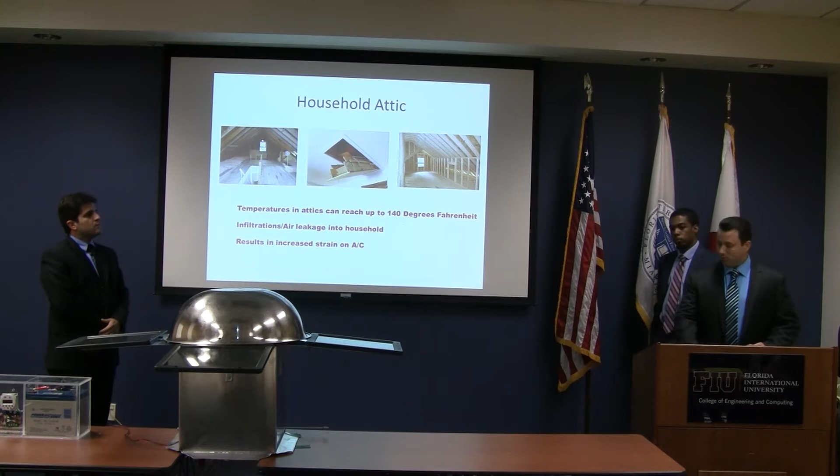We're going to discuss our solar-powered attic fan. Our governing motivation was a result of temperatures in attics reaching about 140 degrees in the summertime in South Florida. Infiltration or leakage into the household can put extra strain on the AC. Also, unwanted humidity can present a problem with potential mold, making it increasingly difficult to store valued items, as well as contributing to energy loss.

Part of the solutions people implement these days are turbines and fans. They can be visually unappealing, provide not really a whole lot of ventilation at the end of the day, and some of them do consume power. So they help you save money, but then they spend money at the same time.

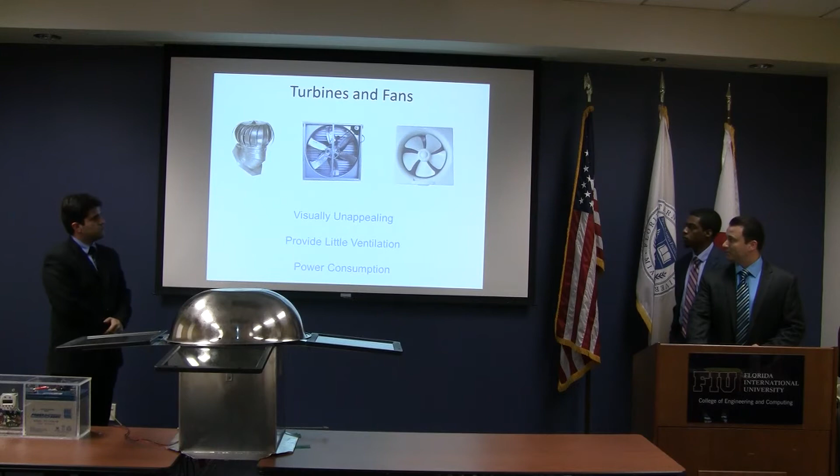Most of these items have been on the market for some time now. The problem with them is that they don't implement any type of rechargeable battery, so if there's no sun, there's no fan spinning, there's no ventilating in your attic. They're basically underpowered in the sense that the average solar-powered attic fan on the market today is about 400 to 500, maybe 600 cubic feet per minute as far as air ventilation.

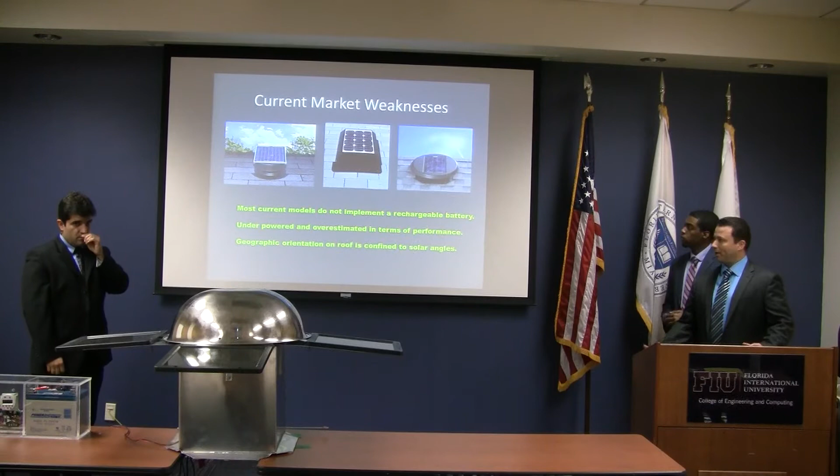That is ideal for some attics, but in other states where you have a larger attic, it's not really helping you a whole lot. As well, there's one solar panel, so the geographic orientation on the roof kind of forces you to put it where you're going to get the maximum optimal sun exposure. It may be on a portion of your house that's unappealing where you don't want anyone to see it, so it's hard to hide these things from your neighbors.

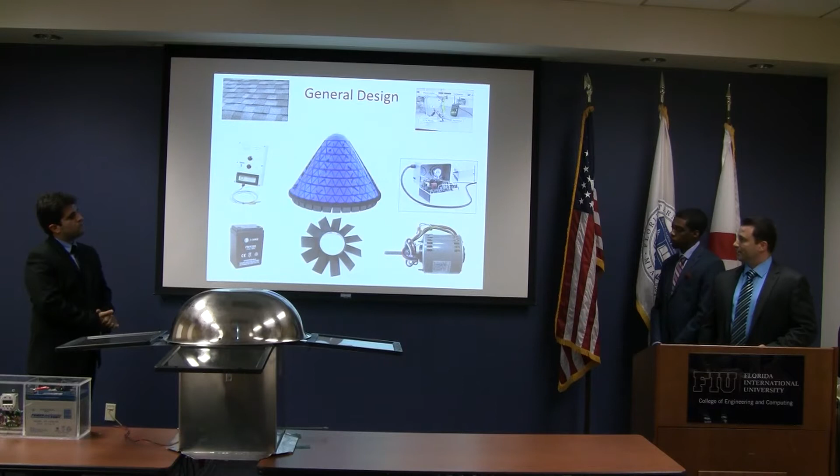General design consists of a photovoltaic cell, which is going to charge a battery, which you see on the bottom left here. The battery then governs a motor-driven fan, and a series of intermediate electrical components will govern the behavior of this. Major components we're going to use are 4 SunForce trickle charger solar panels.

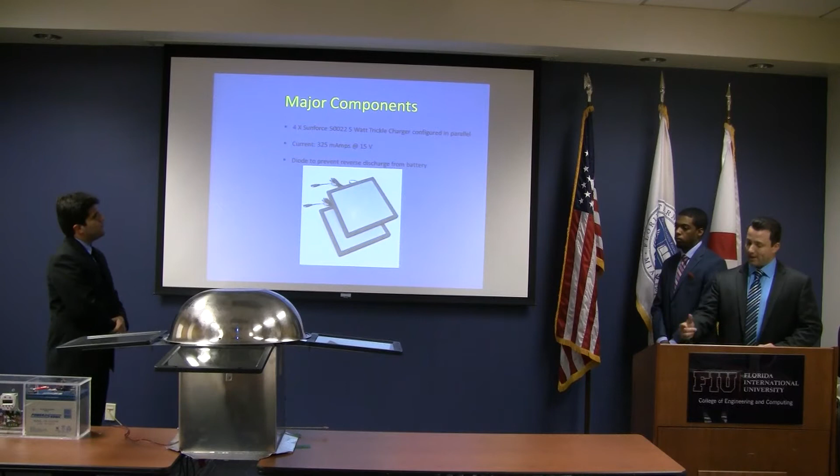We run them in parallel at about 15 volts. They basically produce about a third of an amp. And we have diodes that prevent reverse discharge from the battery, from the solar cell to go back into the battery, so it's going to be basically a one-way current flow.

We have a pulse width modulator, in a nutshell. This is basically to govern the speed of the fan depending on the needs of your attic. You can go from 100 CFMs up to 2,000 CFMs depending on what you need and how quickly you want to do it.

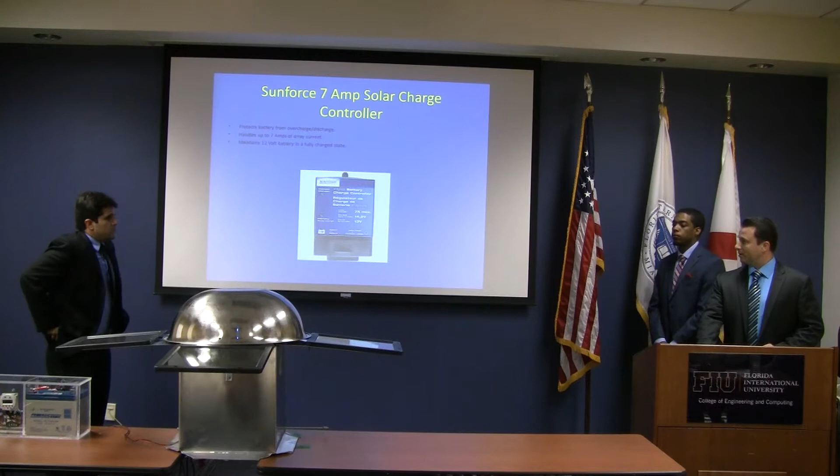So, the charge controller - these are very common with any type of solar system. It basically governs the battery, makes sure there's no accidental discharge, allocates voltage and current, and it's basically a necessity anytime you're dealing with PV cells.

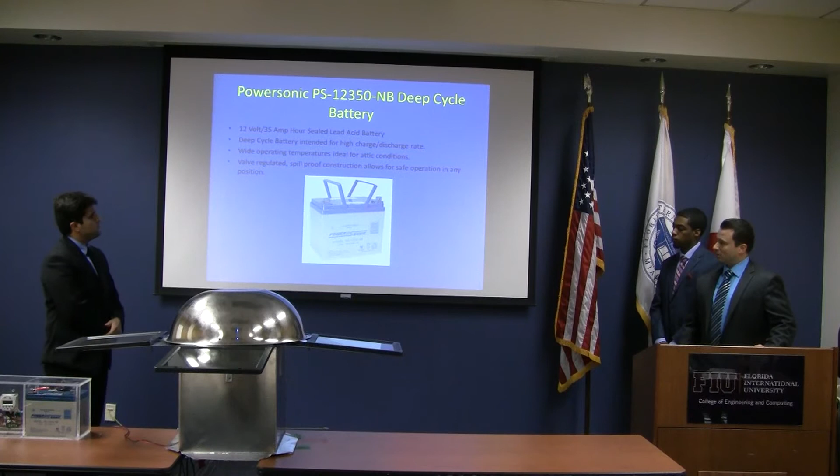Our deep cycle battery - what's different about this is, unlike car batteries, it can be completely discharged and recharged many cycles, many times per day, week, or year. So it's ideal for any type of charging system where you're getting alternative energy. This is basically the backbone of our project.

It's basically governed for a 350 cubic inch Chevy engine, so if it's good enough for that, it's good enough to move air out of an attic, we thought. It's very lightweight, it's basically able to operate in very high temperature environments, and it really requires a low amount of current to run. As I mentioned earlier, it's about a 2,000 CFM rating.

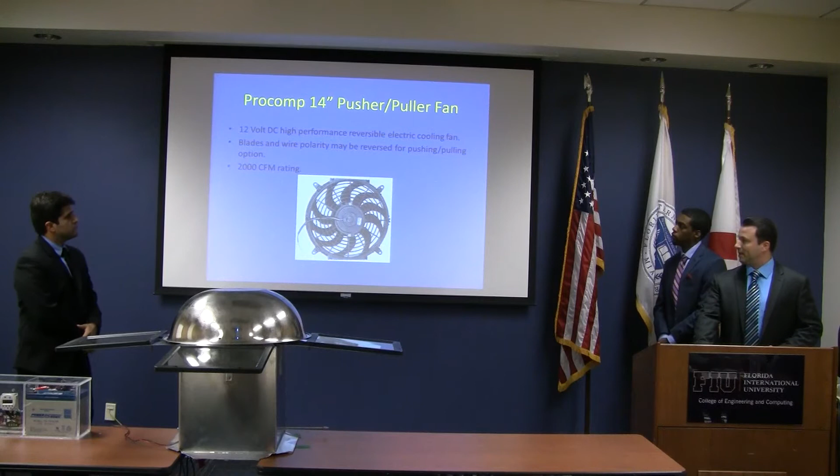Part of our automatic control system here is the implementation of 2 timers we have. Basically they will work alternating with each other. One timer will go, for example, for about 60 seconds, where it rotates the fan, expelling air. We then have an intermediate period where the timer lies dormant.

Then another timer will kick in with a reverse polarity. The beauty of DC current - we can spin the fan in the opposite direction and actually intake fresh air from the outside, depending on what your geographic weather conditions are and your needs for ventilating your attic.

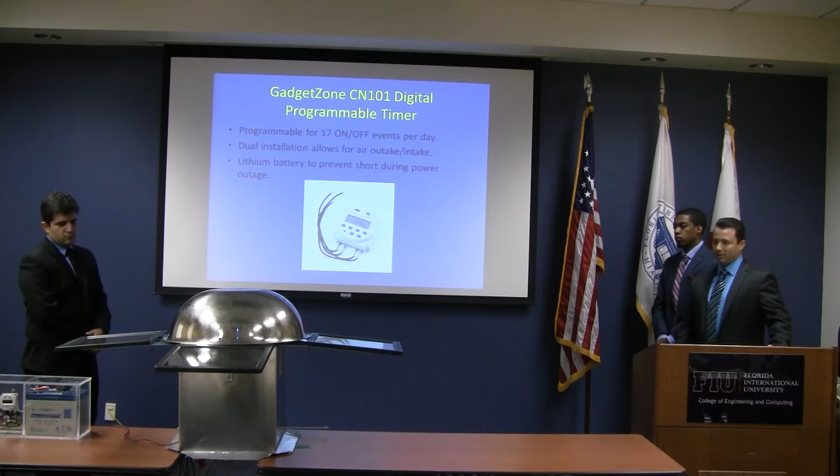This is basically the best aspect of our design. It's what separates it from all the ones on the market. As far as we know, nothing on the market offers this dual nature as far as intake and outtake of air under one design. So that's pretty much our pride and joy of this design here.

This is basically the electrical system minus 3 other panels. As you can see, the PV panel charges the battery, runs the fan to the charge controller. This is our housing, final product, as you can see in front of you. Basically everything was made from a sheet of aluminum that we cut and bent ourselves.

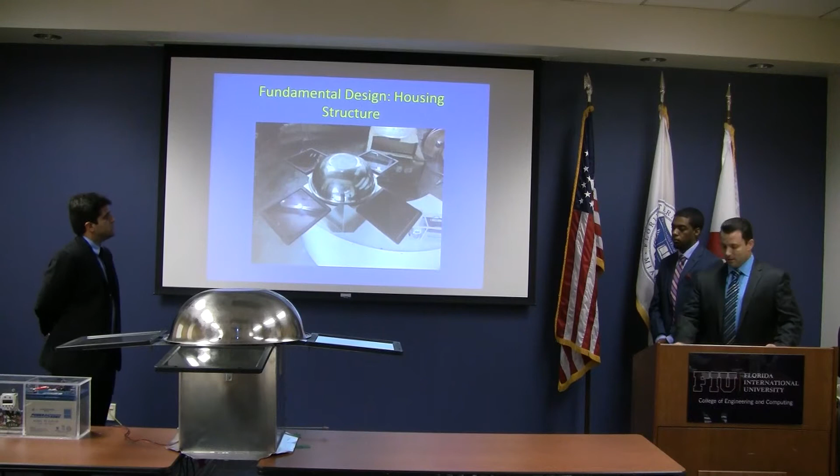This is our control system. You see the two timers, the charge controller, and the pulse width modulator is buried in the back there, in conjunction with the deep cycle battery.

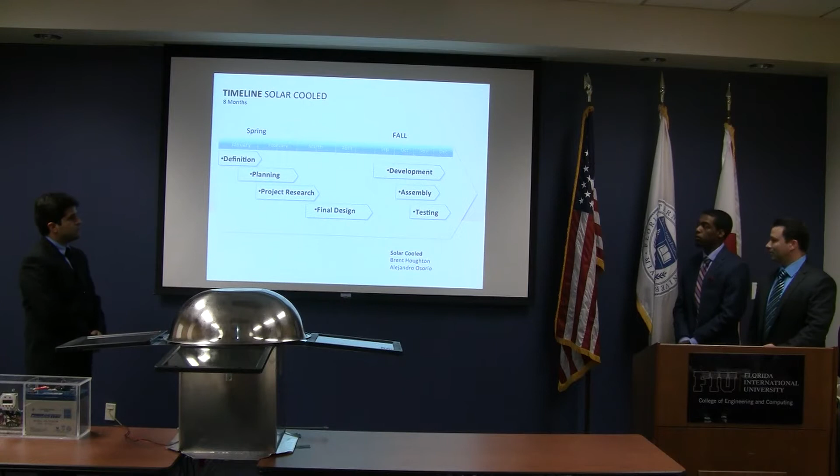I'm going to let Dominic come in and discuss our timeline. As you can see, we started in senior one, got up to our research process, and did the fundamental design. This semester, second semester, we developed what you see in front of you. We began assembly about a month ago, and then testing was kind of tricky, but we got some initial testing done.

Regarding the literature survey: attic fans, solar powered attics, and photovoltaic cells. We have the attic fan used in both warm and cold climates. In summer mode, the temperature in the attic can reach over 160 Fahrenheit.

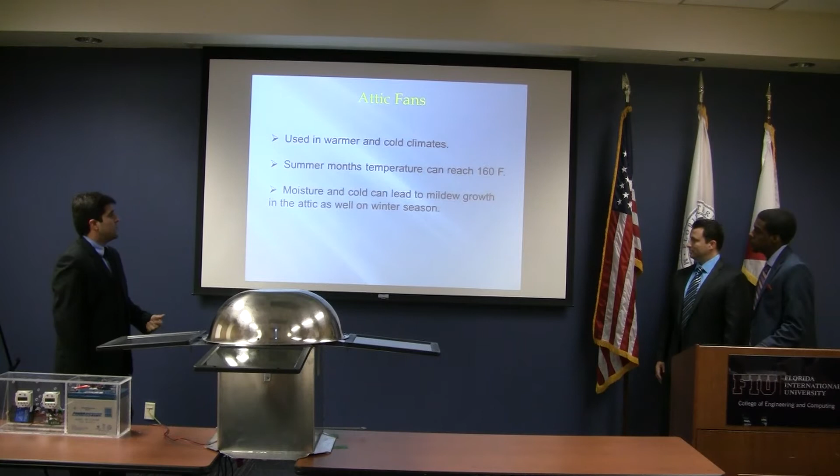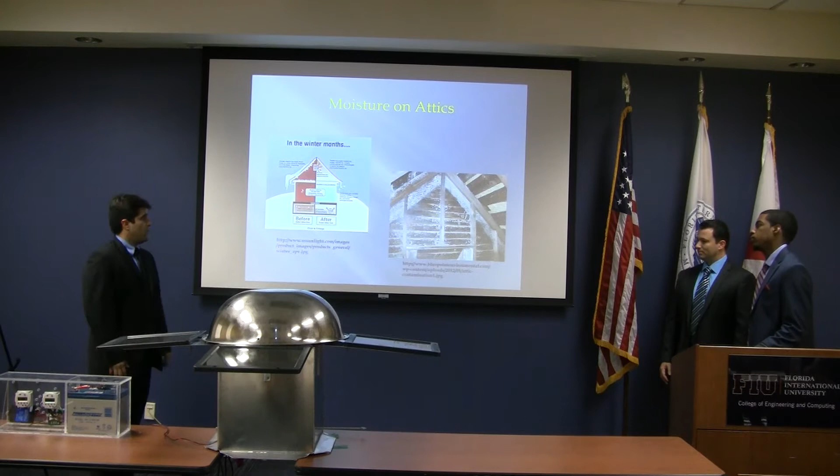In summer season, the attic temperature can reach over 170 degrees when you have the unvented part of the house. In contrast, on the vented side of the house, we can reach temperatures of 150 degrees.

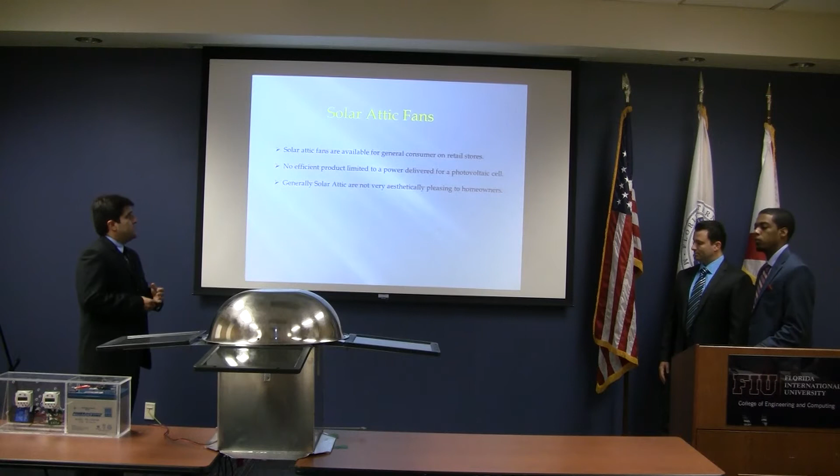Solar attic fans are available to all customers at the most common retail stores like Home Depot and Lowe's. But these products are not efficient; they are limited to solar photovoltaic cells. Our product has a battery incorporated, and we also tried to make it aesthetically better than what's currently on the market.

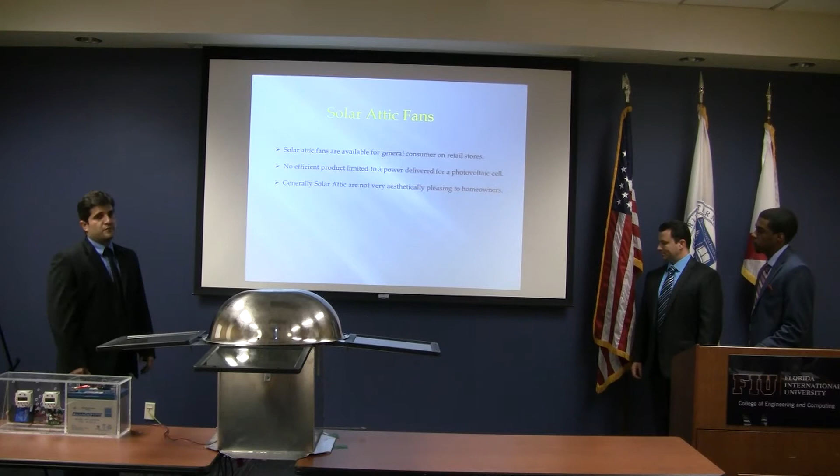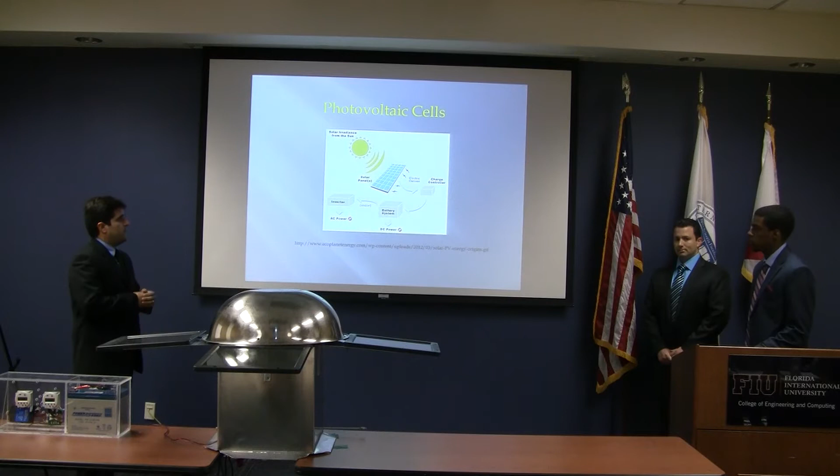This is a diagram of how the photovoltaic works. They take solar radiation from the sun and convert it into electrical current at the controller charger, which then delivers it to the battery as DC power, or to an inverter to convert it to AC power.

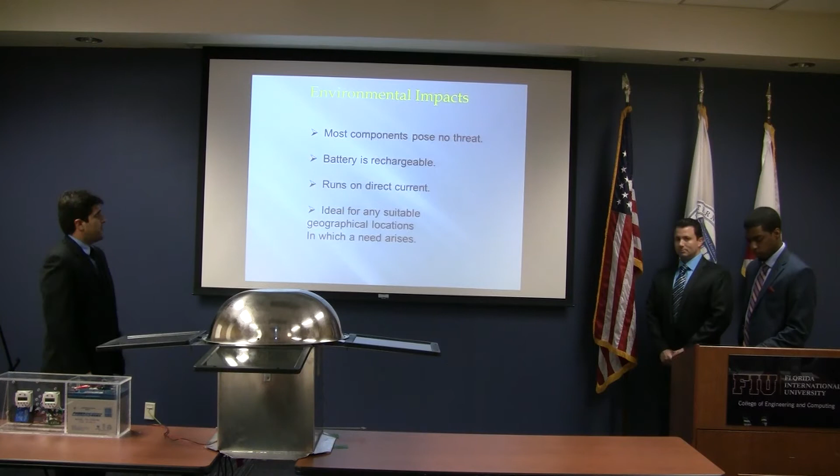The environmental impact of this project: most of the components cause no threat to the environment. The battery is completely rechargeable, runs on direct current, and because of this, it's ideal to install in any location.

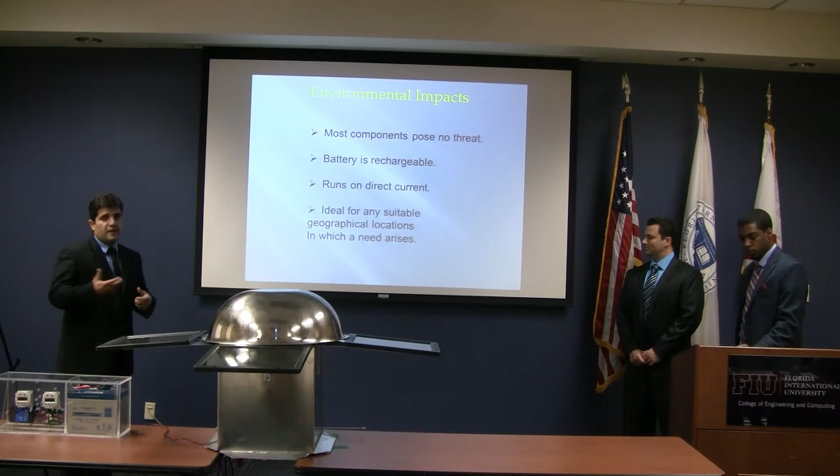The photovoltaic cell, as everyone knows, generates a large amount of electricity without producing any pollution to the environment. Photovoltaic cells also have a working life of about 30 years.

The manufacturing companies that build this kind of product have a lot of laws against them, with a lot of chemical controls related to the environment.

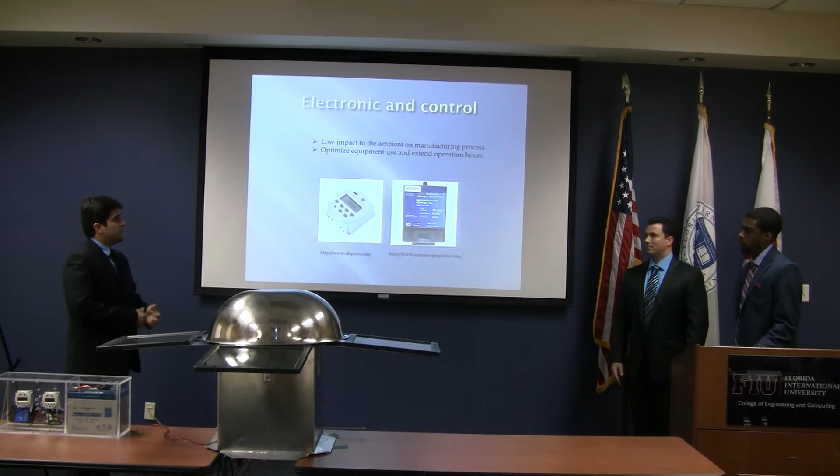There's 96% of the components that are recyclable. The lead-acid battery contains about 60 to 80% plastic, which is also recyclable.

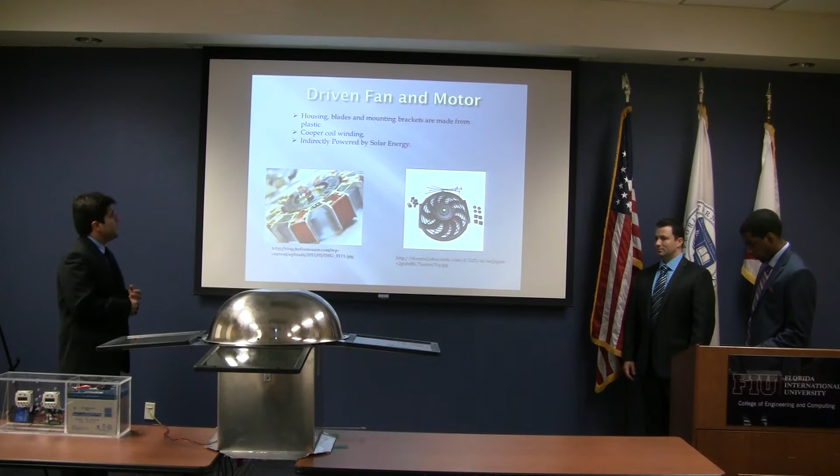So for all this, we have the standards that we followed when we tried to design this experiment. One of the standards we use in building the aluminum body is the ASM, American Society for Metals. So I'm going to let Dominic explain the environmental concerns.

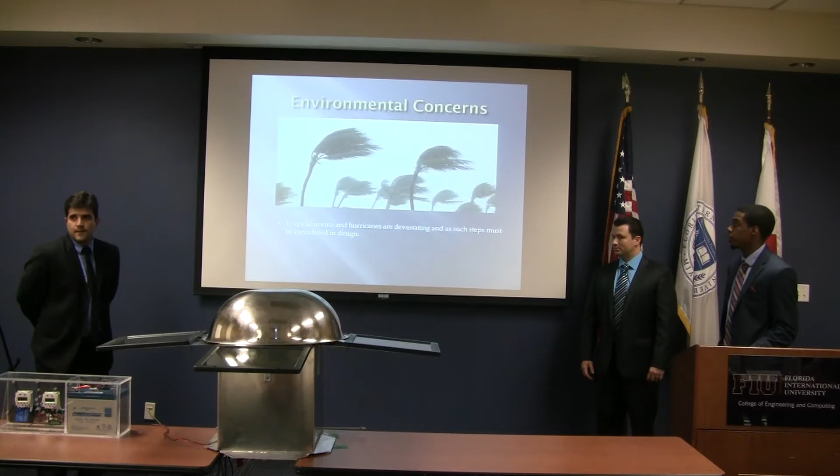Especially being that we live in South Florida, every couple months, especially during the summer periods, we're affected by tropical storms and hurricanes. As such, we needed to take this into consideration when we were designing. Tropical storms, according to the Saffir-Simpson scale, have different categories, up to a category 5 storm.

That wasn't included here because it wasn't taken into consideration for the design. It was the wind loading which would result from category 5. Winds would be too great.

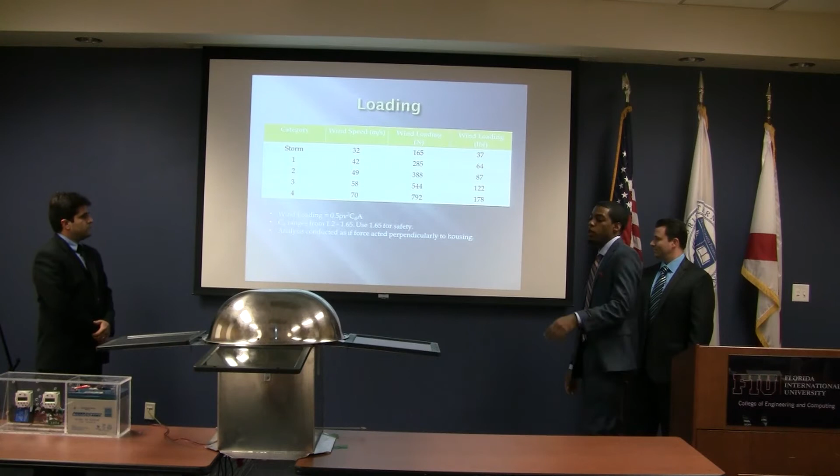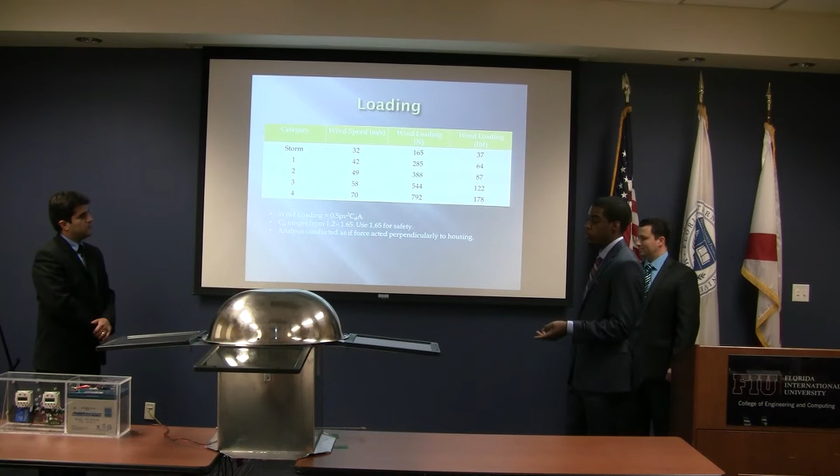As I said about wind loadings, we use this formula to determine the wind loading which would occur, assuming the winds are hitting the prototype perpendicular. The CD stands for the coefficient of drag. To accurately determine that we need a wind tunnel, and that was beyond what we needed to do for this project. So based on research, it ranges from 1.2 to 1.65. I chose 1.65 in order to account for all conditions.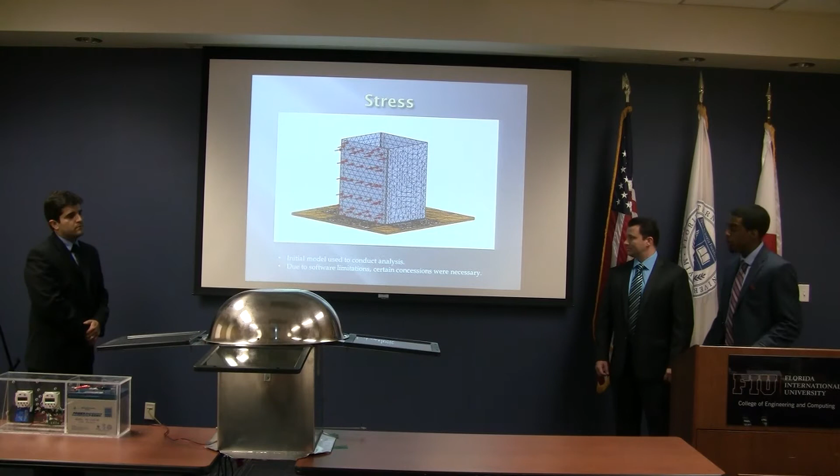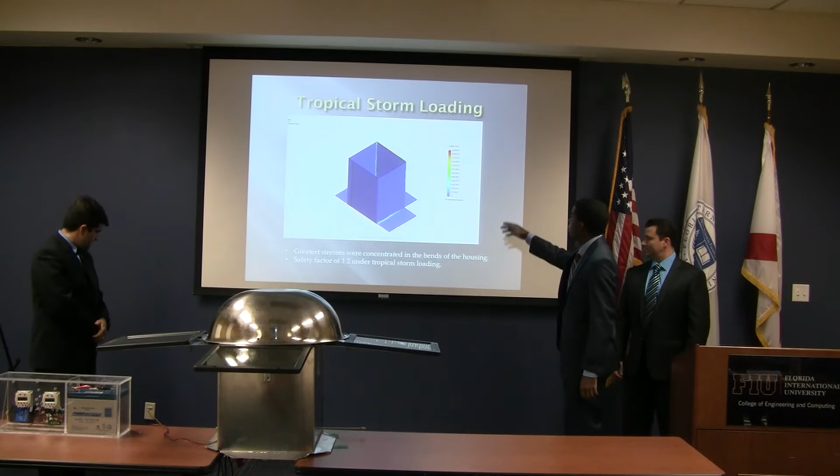This figure shows the results of tropical storm conditions. As you can see, the safety factor is about 1.2, and this scale shows the stresses incorporated throughout the figure. As you'd expect, a lot of the flanges have the greatest stresses concentrated.

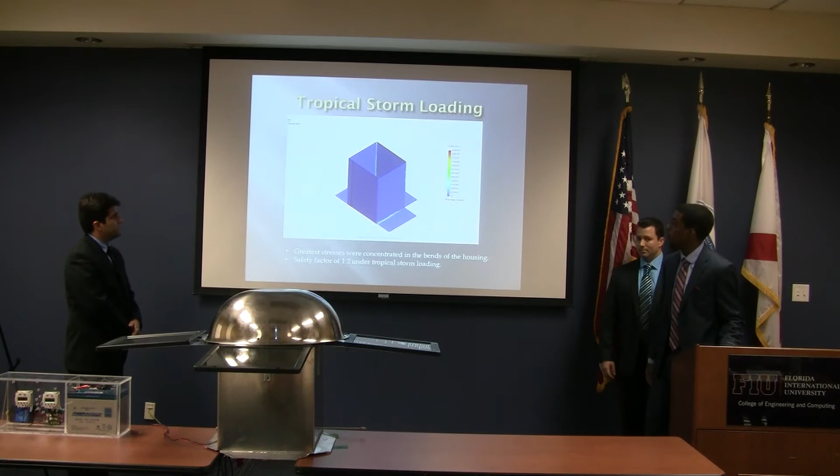This is for category 1 loading. As you can see, the safety factor is less than 1. Stresses within the flanges exceed 49 megapascals.

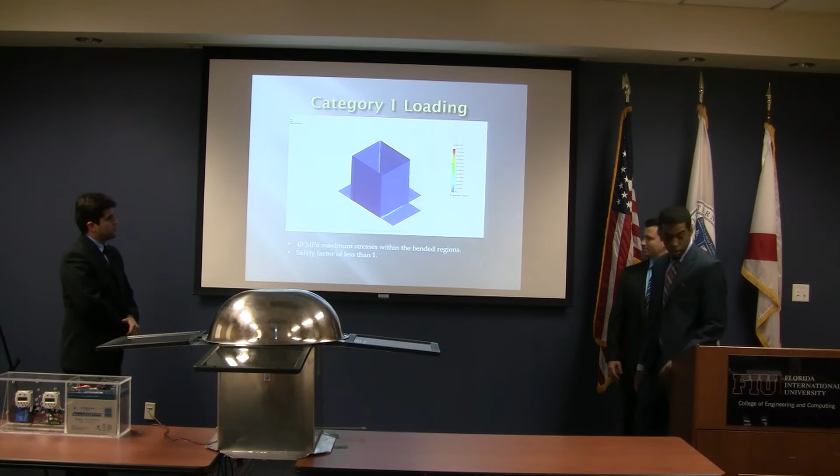Based on the figures before, I never went beyond the category 1 loading because, as I said, it's below a safety factor of 1, so naturally it would only get lower.

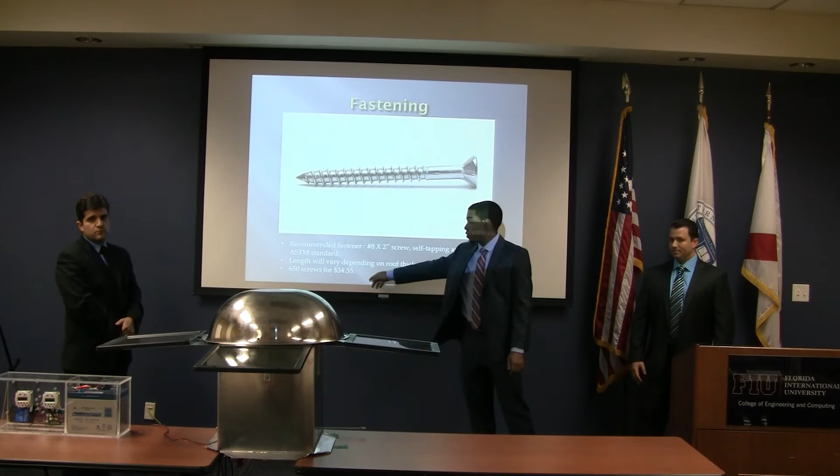So in order to secure it, the housing would need to be fastened, and our recommendation is to use a number 8x2 screw, self-tapping, galvanized, because it's going to be exposed to the elements. This was chosen based on ASTM standards. And for reference, if we were to make this into a product available to the consumer, 650 screws would cost $34.

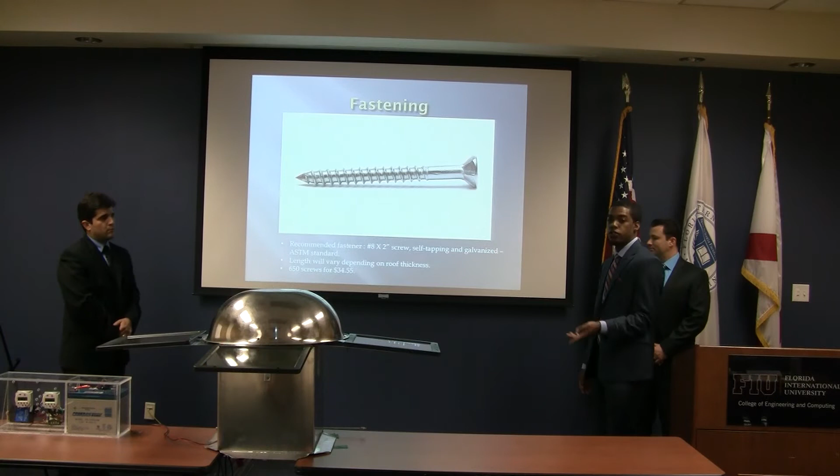One thing I'd also like to mention, as you saw in the previous figure, the fasteners aren't where failure would occur, because the stresses are concentrated within the flanges. The housing would more likely remain attached - based on the studies we did, the flanges would remain attached to the housing. The body of the prototype is where failure would occur.

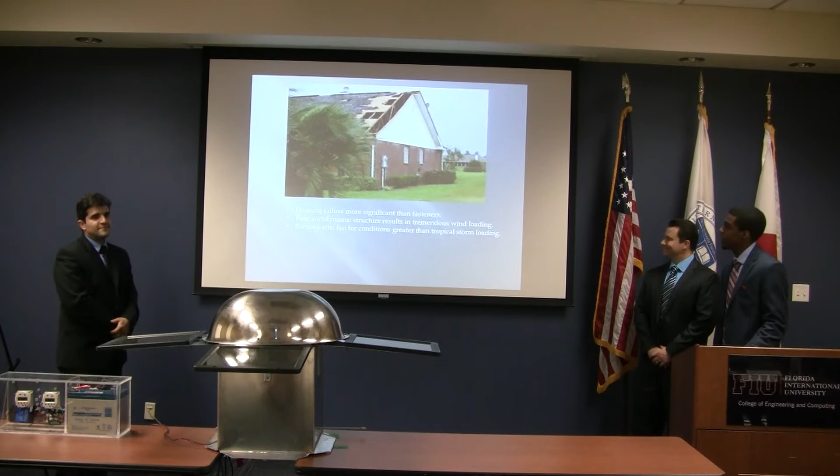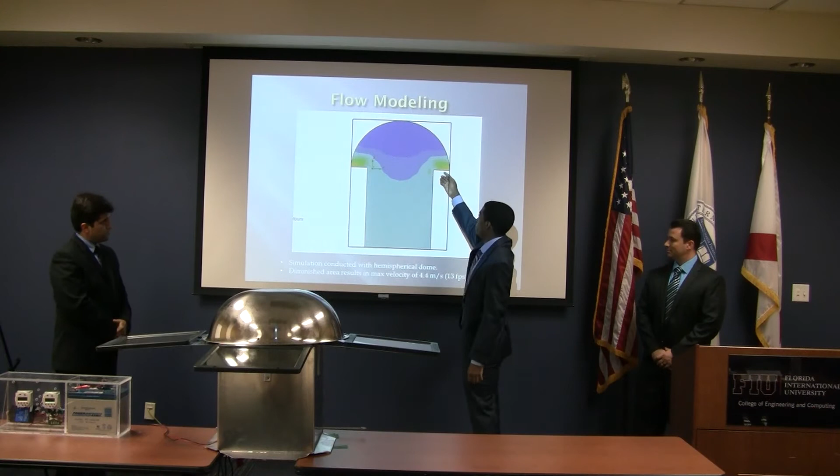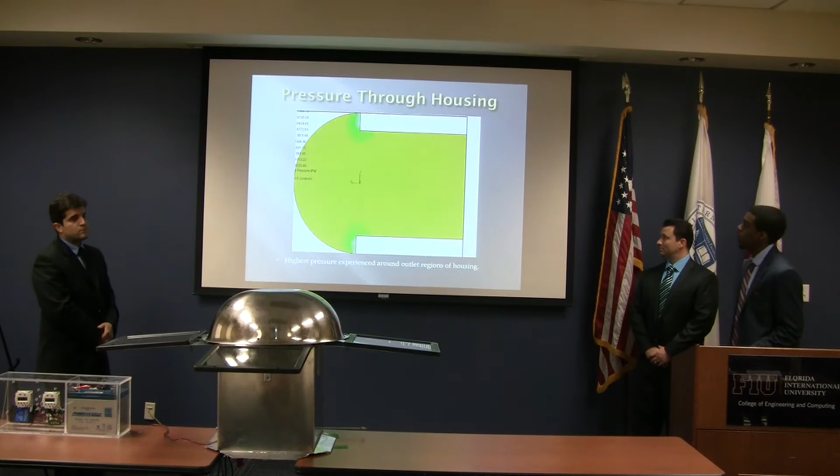This is just a flow model, and as you can see, the maximum velocity, as we expected with the dome, is around the lips, about 4.4 meters per second. We chose that shape because it would produce the least amount of backflow and back pressure. Because of the higher velocities within these areas, you expect the greatest pressures to be concentrated in those areas as well.

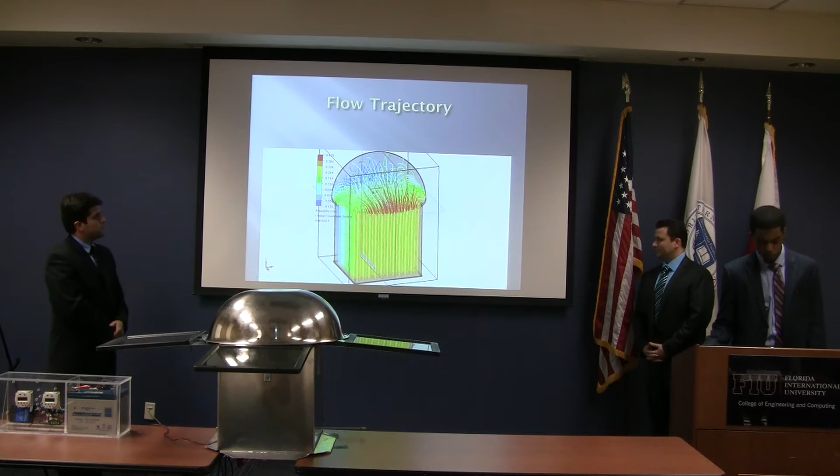So the fun part was the testing of this apparatus to see what our hard work went to. We basically, due to availability, had to isolate our testing to one attic. It's hard to get people to donate their attics to you, especially when you have...

If you go from - I'm afraid to go up there.

The problem with it is that if you do have a makeshift turbine, like the ones I demonstrated earlier, just a convection turbine, you have to take that off to allow yourself access to the hole through the roof. You then have to bring your apparatus up on the roof, leave it there, and have somebody in the attic to govern it from underneath. And in case it does happen to rain, you have to leave this on the roof, or you have about 10 minutes or so in the rain to get the turbine back on. In some cases they require ducting tape and other fastening. So it's not something you want to do when it's cloudy outside, for obvious reasons.

So we weren't able to obtain as many testing trials as we wanted. However, we were very pleased with the results for the trials that we did do.

This is basically the remote you see on the bottom - that's a temperature gauge, it stays in the attic. The device you see on the right is our temperature display, and that can be within 20 feet of the remote without causing any sort of errors or fluctuations.

So that was our bread and butter as far as the results were. We basically would test the attic before, run the unit for time intervals, which I'll show you in just a minute, and see what the temperature was after and what our results were.

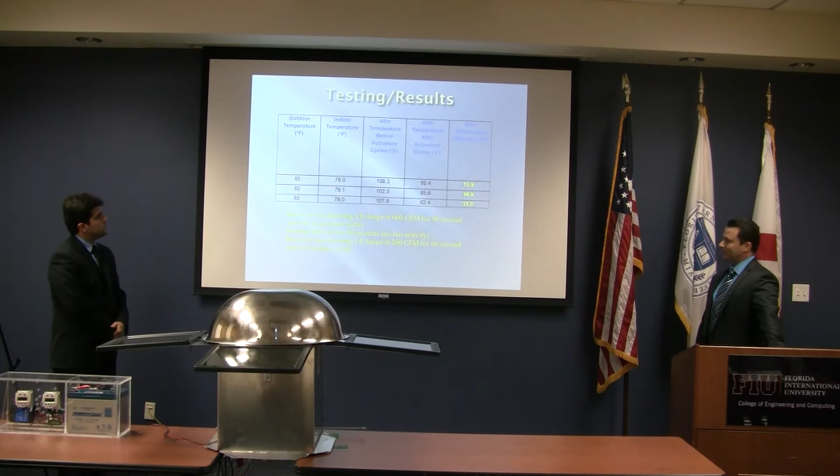We wanted a little higher temperatures to work with, and I'll address that in a bit. Being the time of year that it is, we don't have the nice summer temperatures of 130 to 160 degree attics that I was talking about earlier. I don't know if that's a good or bad thing, but we made the best of it. Nevertheless, the hottest day we were able to find was 85 degrees within the last two and a half weeks.

In between that, we had cold fronts and rain, making it harder, so we had to basically work with what we got. At the end of the day, our attic temperatures were based on preliminary temperature with no ventilation at all, as is.

We then had a fan enclosed inside the apparatus here that we didn't run on its maximum speed. We wanted to see what it did in its lightweight mode, so we ran it with about 1.8 amps at 600 CFMs for 90 seconds, let the timer stop, and rested for about 60 to 90 seconds.

Then the reverse polarity kicked in and actually took in air from the outside into the attic, at a smaller CFM because of the orientation of the blades and whatnot. We only get about 200 CFMs, but we're not trying to bring a whole lot of air into the attic. That resulted in a temperature change of what you see here on the right as almost 14, 17, and 16 degrees respectively from start to finish.

But this was all over about 4 or 5 minutes in time. So we can imagine where we'd be if we had this totally self-sustaining, running automatically. It doesn't need any human interaction. It has potential to run 17 cycles a day, off and on, clockwise, counterclockwise, intake, outtake.

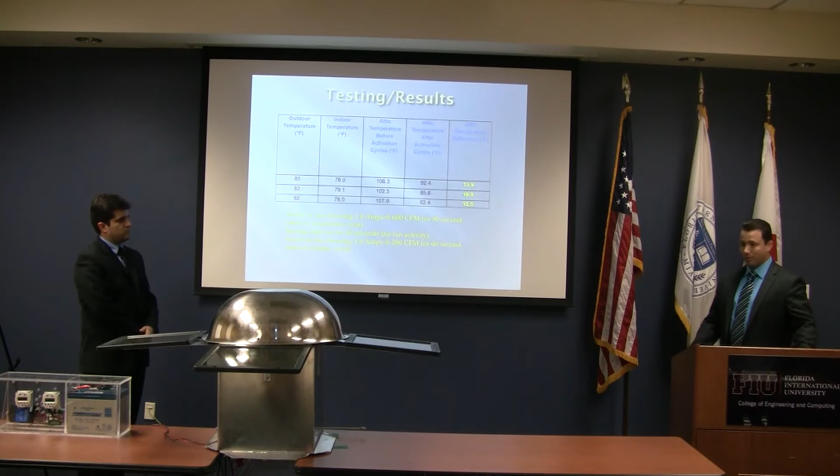You can obviously see what it can do on hotter days as well. We can notice the trend that it would probably lower the attic temperature 20, 30, maybe 40 degrees. Hopefully we'll find out sooner or later what its potential is.

Something I said during our last presentation back in May kind of came back to hit me, just run it by you real fast. If we have volume, which I don't think we do.

Somebody asked if we were going to build this and when we were going to test it, and according to our timeline I told them yes, we were going to build it, yes we're going to test it, and I jokingly said in December when it's cold. Obviously we had some design problems, we weren't able to start testing until late November. Then we had the rain and the cold front, so we actually did our last day of testing yesterday in December. It wasn't quite cold, but it was the cold that stopped me from getting 25, 30 trials rather than 3. So you got to be careful what you say sometimes jokingly.

So, basically in conclusion, there's a lot of systematic ways we can govern as far as how much this is going to save you in electricity by keeping your attic cooler, how much strain it's going to take off your AC. There's really no cut and dry.

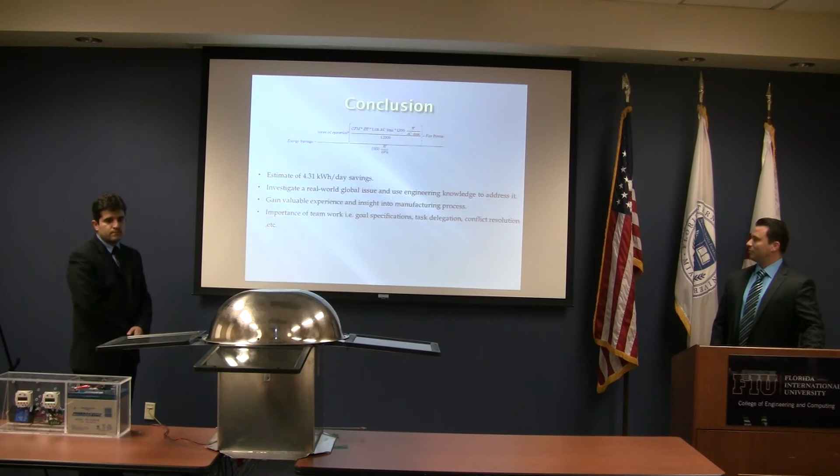Some controversy says that attic fans will take cold air out and bring it up into your roof and leak it out, ruining it for everyone. That's only if you have really poor infiltrations, leaks, and insulation issues. So we basically just went with a general one, very modest, based on the low CFM movement that we had.

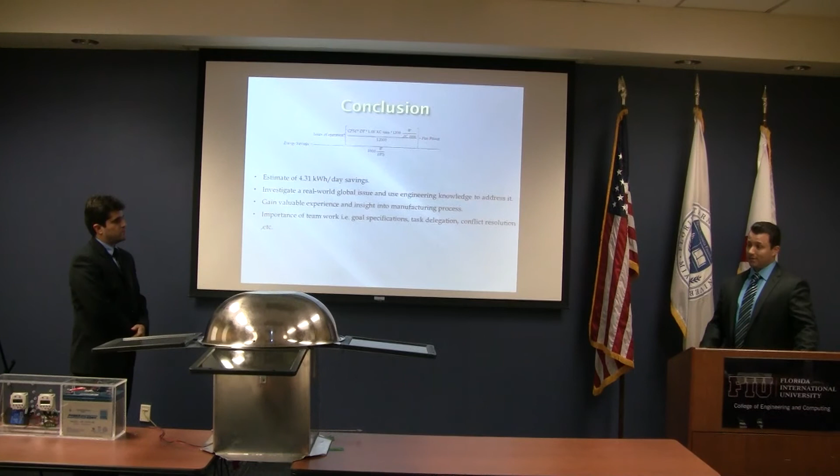With 17 cycles a day, day and night, with or without sun, the battery can still sustain itself even if you have cloudy days. It's got 35 amp hours, so it doesn't need a lot of sun to hold and sustain itself for a good 5 to 7 days.

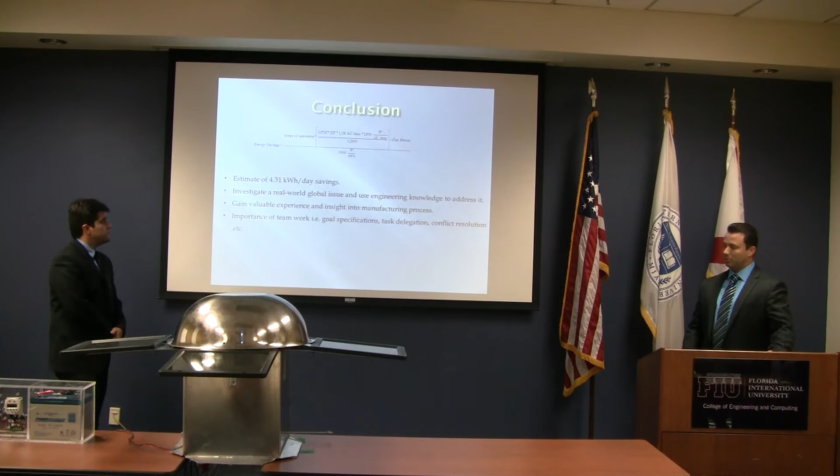It came out to about 4.31 kilowatt-hours per day in savings for the most part, and we basically equated that to—it didn't make it to the PowerPoint on such short notice—but it's coming in about $250 to $300 per year. Those are based on modest conditions at about 600 CFMs. The potential here is for 2,000. Depending on the time intervals we tweak and find out what's optimal, we hope that number could even get higher, but nevertheless, it pays for itself pretty quickly.

In a nutshell, we'll give you a quick demonstration. These are the two timers that are going to oscillate clockwise, counterclockwise, or counterclockwise, clockwise. I'm just going to do it manually. Initially, I wanted to have the timers oscillate while I was giving the presentation, but we realized that was going to be too loud and distracting.

I have it here up to full speed. This is as loud as it gets at 2,000 CFMs. So if it's up in your attic and on your roof, you're not going to hear this—the noise from your air conditioner is going to by far outweigh this noise. So we're happy with that, in the sense that it's pleasing to people.

It has a slow discharge rate from the capacitor, so we realized the hard way that you can't have these connect real quickly, because capacitors hold energy, and you know what happens when we cross polarities. So with that, that'll conclude our presentation today.

Did it cool off by 5? All right.

Okay, so I'll start off. First question I want to ask, near to my heart, is Hurricane Andrew. This particular structure, as I'm looking at here—you did not test for hurricanes, because you basically tested the substructure, you didn't test the whole assembly. How do you think this whole assembly would handle Hurricane Andrew? I mentioned that in the presentation. We recommend, as I said, the failure would occur within the housing because of the high coefficient of drag. Do you think that's the case? I mean, I would probably think I'd pop that top right off the bat.

Okay, your question. In your design requirements, you said you designed a tetrahedral shaped housing for the solar cell that would allow maximum solar absorption regardless of position. What data do you have to defend that statement? Due to cost limitations, that was our initial guideline. We wanted to have the image that I showed you earlier—it was a complete, nice pyramid shape. We realized what the cost was going to be and opted against it. We didn't have the funding for it, so by tetrahedral we mean we have geometrically oriented four sides. It's not quite the pyramid shape from a topological standpoint, but that's the reason for the change. We didn't have the funding to create it that way, so we had to do the best we could with the 4 panels that we had.

Okay, and then the last question I'm going to ask is, you made the statement that you're going to use galvanized screws to put this into your roof. What is that structure? It's aluminum. Would that be a problem—galvanized into aluminum? From my knowledge, that's it. Okay, you can correct me. Yeah, it's a problem, I know.

Okay, thank you. My question relates to structural—you're gonna have to get those long screws into something. What are you gonna get those screws into, just the sheathing or into the trusses? The sheathing. And do you think that a modest wind load on that wouldn't blow it off if it's just anchored to the sheathing?

I think the safety factor on the tropical storm condition is 1.2, so honestly, if this were to go to a general consumer, I'd say remove it for tropical storm conditions. No, I'm saying a modest wind, like 30, 40 mile an hour wind. Yeah, that's tropical storm conditions, because it's based on like 28 up to 42 miles per hour. I used the upper limit in the calculations, as I did with the coefficient of drag, so 30, 40 miles per hour would be within those tropical storm conditions.

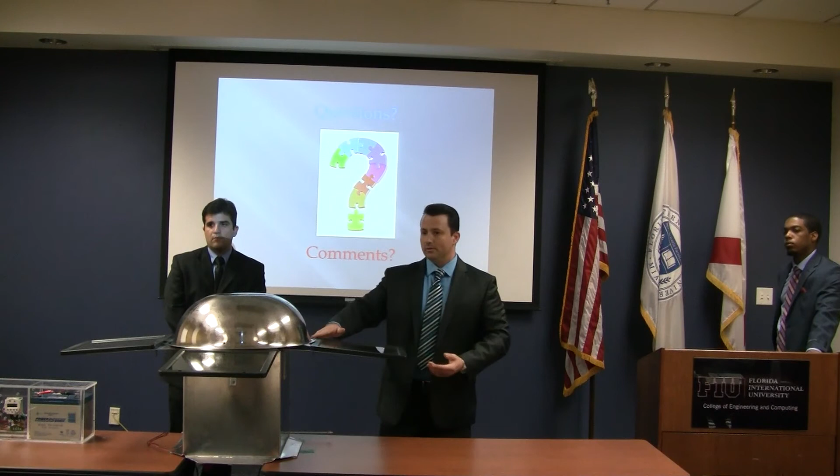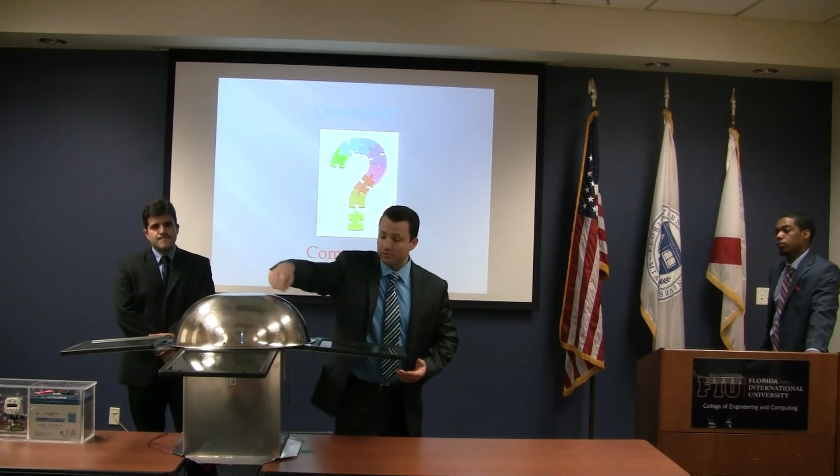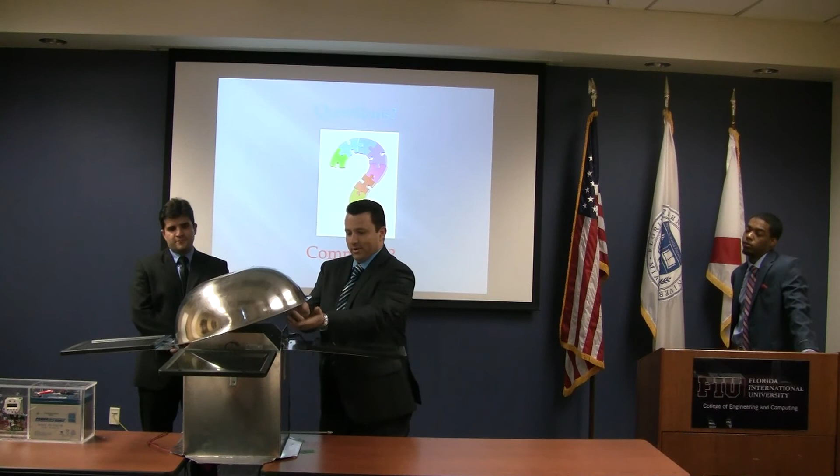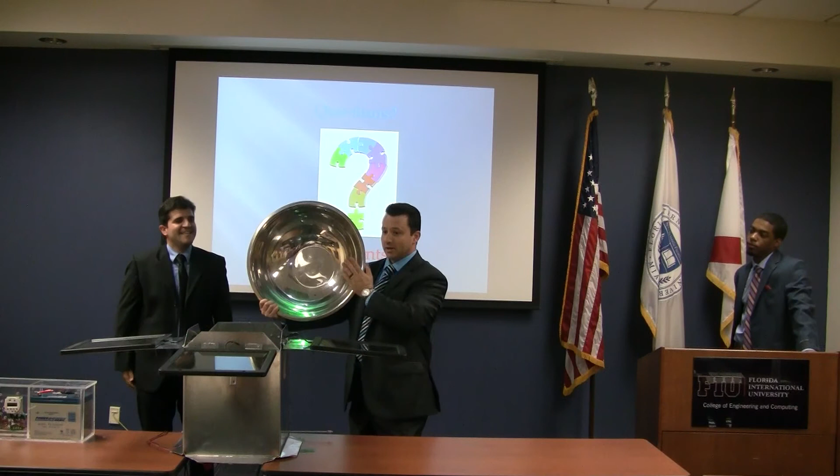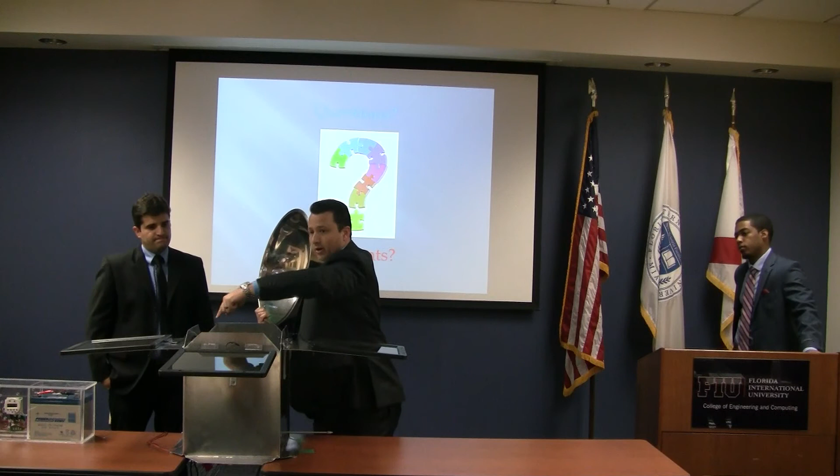Air will come up through that tube from the fan and disperse out through the salad bowl-shaped part. When you measure the distance of the overhang, it was about $300 to have somebody custom weld something for us - we bought this for 22 dollars instead. So when you have the rectangle here, this leftover area equals the area showing here, so there's plenty of room for the air to come in and go out.

Well, you should get in the salad bowl manufacturing business. I didn't make it. Just a couple quick questions - I kind of made a face, but I had the same question. It's a little bit hard to tell how it works, so don't feel bad, Stephanie. Okay, thank you, I feel better now.

A couple other questions - first, the comment is I'm happy with what you guys did, because understandably you're not going to try to make a production product just going through senior design, but you did really good engineering here by coming up with solid solutions at a cheap cost. That's really interesting and commendable. The other thing is, I understand why you want it all in one, but why not separate some of these components, especially like the solar panels?

There's really not a whole reason why those solar panels have to be located right on that structure. In fact, it's worse to have them there, because then you have to go up and take them off. Maybe it's easier to put the solar panels on a little platform right next to this thing and remove that.

Going forward, from what you've learned from this initial design, is there anything you would redesign? To me, another thing would be to make it a permanent structure, cut a hole in your roof, put all this stuff below, and just have the vents come out. There's a whole bunch of different things you could do to mitigate a lot of the hurricane issues. So is there anything you guys would recommend?

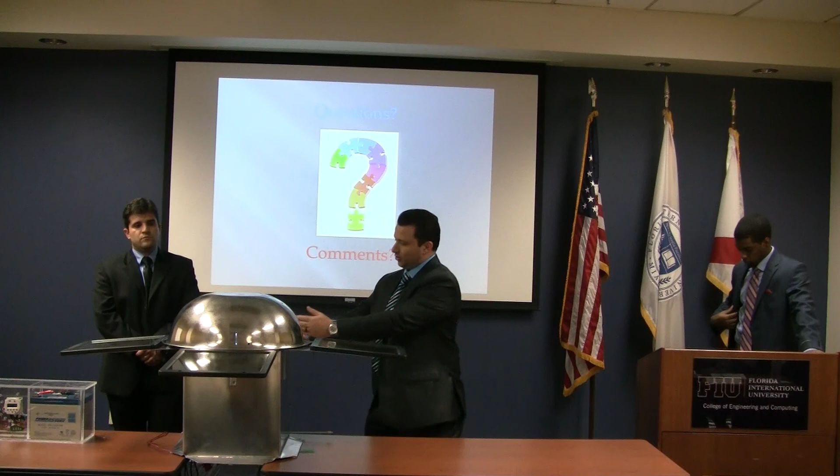But just in general, getting them closer to the roof, maybe turning them—I see what you're saying, down here, but then you lose some from the far side panel. It's hard. We wanted to give the option—in a perfect world, if we had more money, these would be adjustable. Depending where you live, if no sun comes up in one direction, that panel would go down, since it's not going to get anything from there, that panel doesn't need to be up. So wherever you spin it, you identify where your sun is and where you don't get sun, and orient the panels accordingly—this panel goes up, this one goes up.

It would actually not have this symmetry about it—it would have different orientations, like satellites tend to do. Not that I'm comparing this to a NASA satellite. It looks like one, though. It could end up being a satellite.